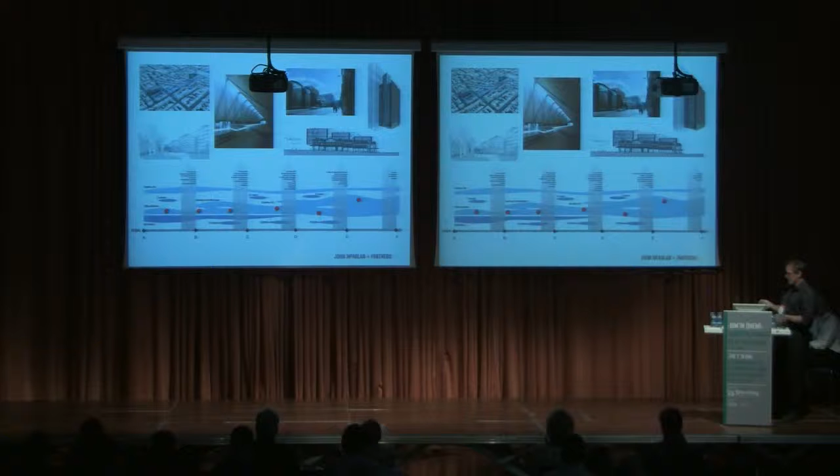We work in a very messy way, actually. We sketch, we throw things away, we reinterpret things, we draw constantly, and our method of working has to accommodate that, and we have to enable ourselves to do this kind of stuff whilst maintaining this flow of data. Okay, so I think that's a key motif of the way we organise ourselves.

As importantly, though, and interestingly, the previous speaker was talking about computational design and the continuities or otherwise with the generic idea of BIM. This process has to enable us to capture as many of those sources of information and approaches and attitudes to information to enable us to fully develop our work.

So this kind of thing, which you'll see later on, people will recognize as a BIM model. It's fully coordinated in the sense it has data attached to it, and it's a very powerful method for delivering a project. However, we have to, as architects, get to grips with and understand organising our data in structured ways, perhaps in ways that come from other domains.

For instance, parametric studies for complex curvatures, which you'll see in the project we talk about later. These two snapshots are examples of exactly this kind of thing. In this case, a neural network, an artificial neural network, to address a specifically architectural problem of form finding, and a genetic algorithm which is addressing, again, a specifically architectural problem to drive optimization in relation to a townscape and visibility analysis.

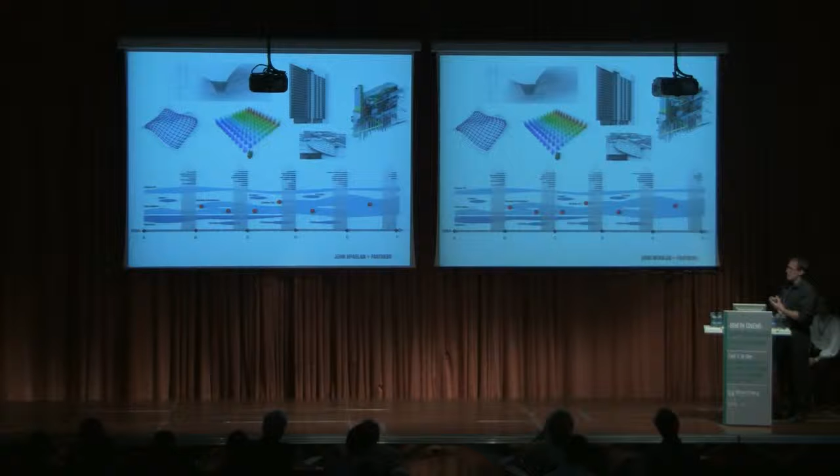One last word about the process: we mentioned that we use MicroStation, and our host Bentley, who have invited us to come here, we have a long association with them because we use their software. We use it because it supports everything I've been talking about. It supports the fact that we can work in multi-modes, it supports the openness at the beginning and end of each model, and it supports the fact that we can disaggregate data across very complex projects if necessary.

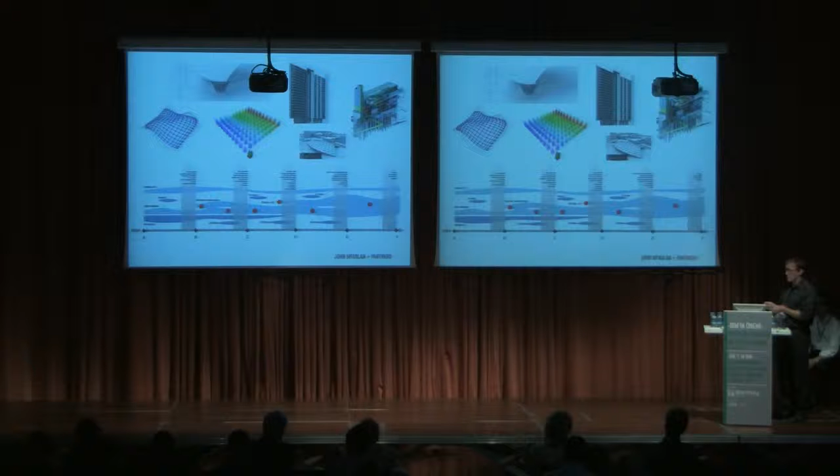And in that sense, it reflects real life. Real life can't be encapsulated in one fully coherent model, and any fully coherent model that doesn't relate to real life in some way is not of value to us. I'm going to illuminate some of those rather abstract ideas by looking at two case studies.

Both of them are actually literal examples of connections. They are both high-profile, massive infrastructure projects in London, at the heart of a world city. Their client base, the people who use these projects, is not a small, isolated group of individuals or an organisation. The numbers of clients for these projects runs into tens of millions, actually. So we can really say these are world sort of projects.

We're going to talk through these, and we're going to illuminate some of the project technology and BIM aspects of them as we talk through them. So I'm going to hand over to Hiro now to take over at this stage of the presentation.

Okay, hello, merhaba. That's all I know. Okay, I have to admit, I'm a simple architect.

He's the BIM expert. Cliff is also an architect, but he's managed to really articulate the importance of technology and BIM within our practice. I sort of pretend to understand, I don't. So maybe I can reach out to those people in the audience who are still with me at my stage, who are trying to understand what is BIM, what is a BIM in the process of design.

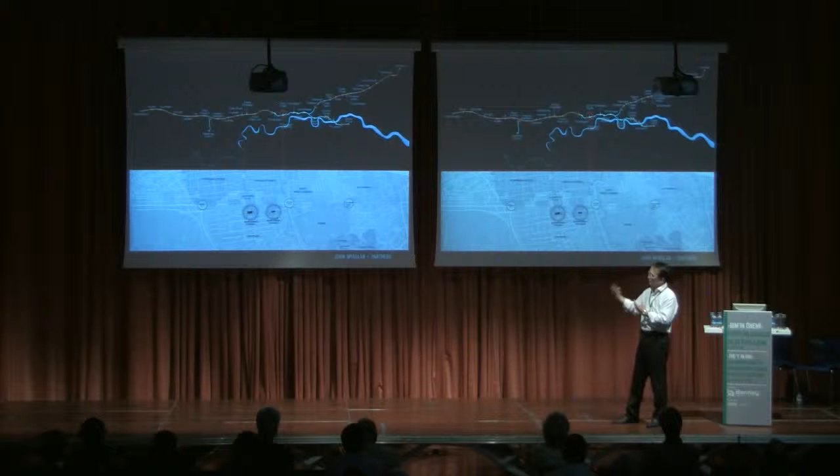So this is where my anxiety is, because I do know that the clash detection issues, which is highly important, the ability to predict what might happen during the construction stage, is all vitally critical stuff. But how does that relate to our behavior during the design development stages? I don't know. I've yet to see BIM really go in there and challenge each one of us to be able to fulfill our obligations as designers early on in the design process.

That's not to say we haven't used CAD, we haven't used technology. Of course we have. But in terms of philosophical debate about BIM and the discussions around technology, I leave that thought with you.

Just incidentally, hands up if you're an engineer. Hands up if you're an architect. Excellent, so I shouldn't be too scared then. How many of you are clients commissioning projects? None, excellent, we can be rude about them. And how many of you are contractors responsible for delivery? One sole person over there, two, three. The point is we should all be talking to each other, and this is what I'm hoping BIM will facilitate, not separate us further. Anyway, enough of that.

As architects, we develop and share ideas about our particular concerns. These are to do with movement. My responsibility is transportation and infrastructure design, so it's all about movement - movement of people, movements of vehicles, making sure that we don't clog up. This is Oxford Street, arguably one of the most recognizable retail destinations around the world.

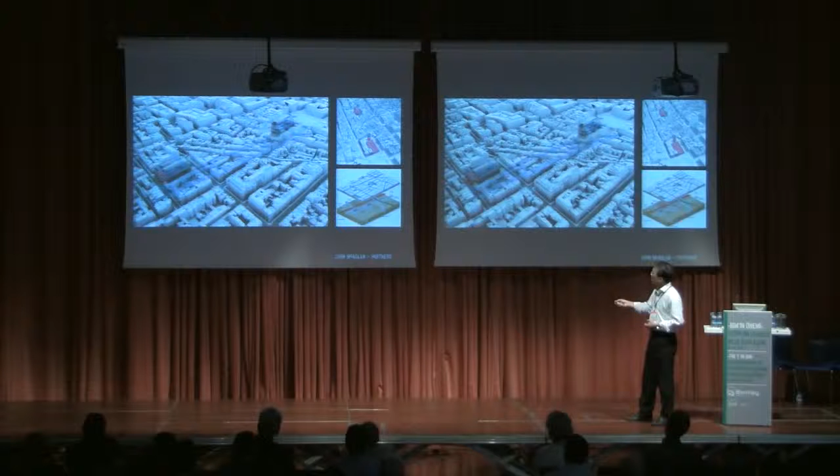So along that we have two big station structures popping up in the east near Hanover Square, and to the west next to the existing Bond Street station - major pieces of civil engineering. General arrangement, section at the top: West Station, East Station, diving down by escalators to these really long platforms.

And yes, all of that is of course fully coordinated thanks to the technology we have the ability to use. I think we initially started on TriForma - I don't know what it's technically called now, I'm an idiot, forgive me.

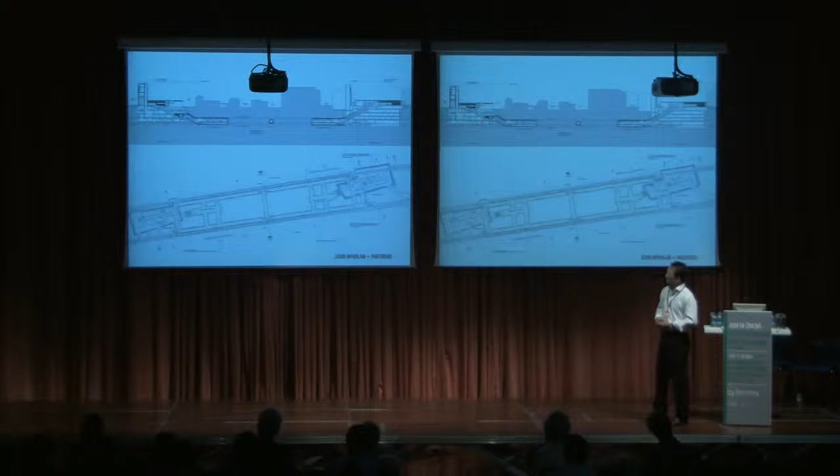I believe it's the Bentley system that we are still plugged into. As Cliff mentioned, I think it's right - architecture and engineering design can be messy, should be tactile. And that's where I'm really interested to see where BIM is going to take us, because we love models, we love sketches, we love messy things. Somehow in my mind, I see BIM as a really clean and almost sanitized version of the world, and I just wonder how that's going to provoke and challenge and take our design world into the next stage.

So at Crossrail, there were issues about external obligations in terms of how the building sat within the context. You can see there's an interesting visual - day one, just a station with a huge chimney. Day two, in the future, we have an overstation development landing on top, so all the interface issues are fairly important to get right.

Again, the BIM model allowed us to predict what happens when we're building this on day one, and all the impacts on the surrounding movement of people and traffic, but also what might happen in the future when we surcharge the pavilion - what I've called the colonnaded pavilion structure - with a 6-story building on top. It's all simulated and computational wizardry that I really wouldn't pretend to know how it all works, but it's been all assessed, and that's something we probably couldn't have done to this sophistication and accuracy maybe 10-15 years ago.

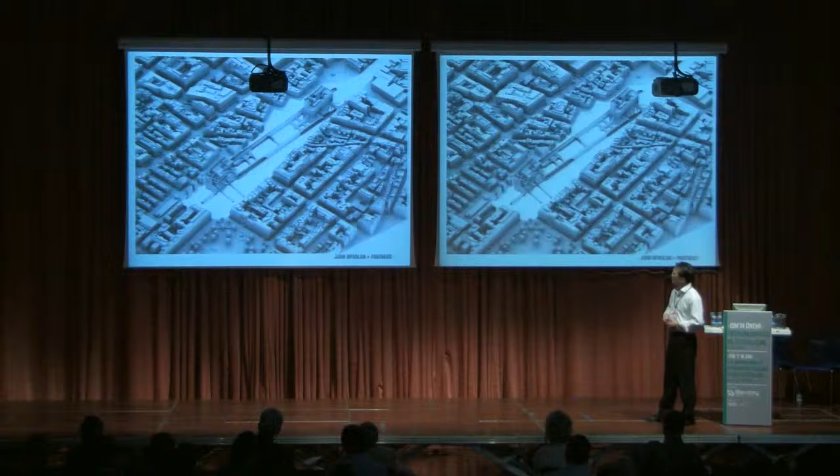And I suppose this is where I might start to hand back to you, Cliff. This is where the thinking has turned into commitments of what the general arrangement looks like in the BIM world. I hope this doesn't sound a bit too much like a schizophrenic presentation.

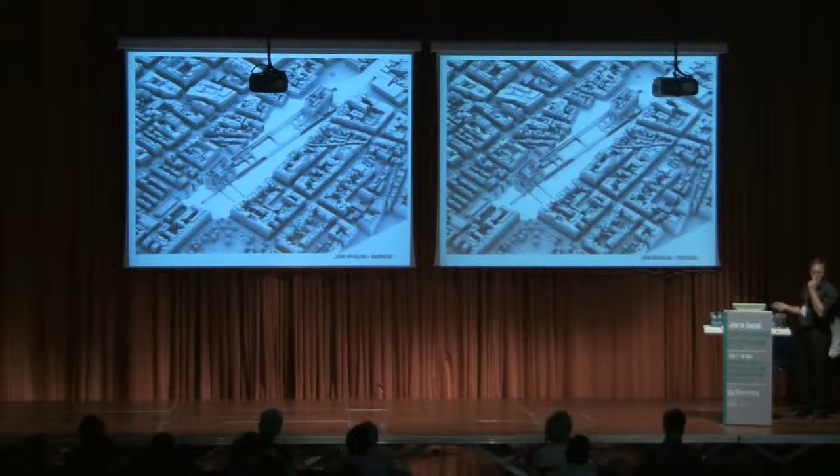Much to Hiro's disgust, underlying all the detailed work we need to do in our architectural enterprise sits what is probably the biggest BIM model in existence, and this is only a very small part of it. This is an enterprise level collaboration between Bentley and Crossrail to deliver the whole project in Bentley architecture, in BIM, using the full suite of Bentley products sitting on top of the MicroStation platform. And here's our bit of it.

There are literally thousands of models in this BIM model, so this is a big BIM model disaggregated into thousands of separate models, which makes sense. It's a really smart way to work. We can re-aggregate models as and when we need them to work on them, and that's precisely what we do.

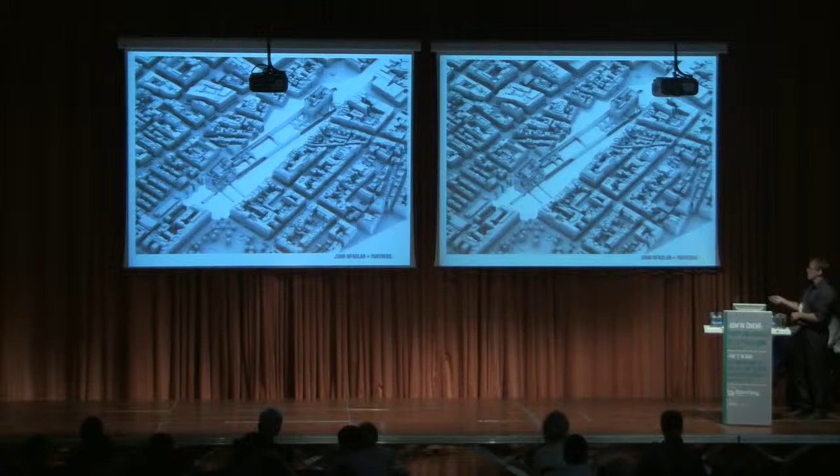So for our element, we use the models - we don't need to repurpose data. We can use it in our workflow for that kind of detail level of work that Hiro was talking about. And we can routinely use it to leverage this kind of design verification work, looking at spatial sequence of the narrative of the building and so on.

Can I just add one more thing? Just to go back to this slide, I want to mention where BIM really excels is when we're trying to do something like this. This is what I called nowhere to hide architecture. If you look up, you see things which are exposed, and there's a confidence in expressing ventilation, structure, primary, secondary, tertiary, fittings, all sorts. And that's one approach.

What we decided to do here is essentially hide all the conduits. There's nowhere to hide, so you've got to get all the conduits, cable management, everything sorted out before we go to site. I'm not saying this is - this is an amazing space and it's got this amazing quality to it, but we're trying to do something where we really would have had trouble doing it if it wasn't for the CAD and the IT technology, equipment and tools that we have.

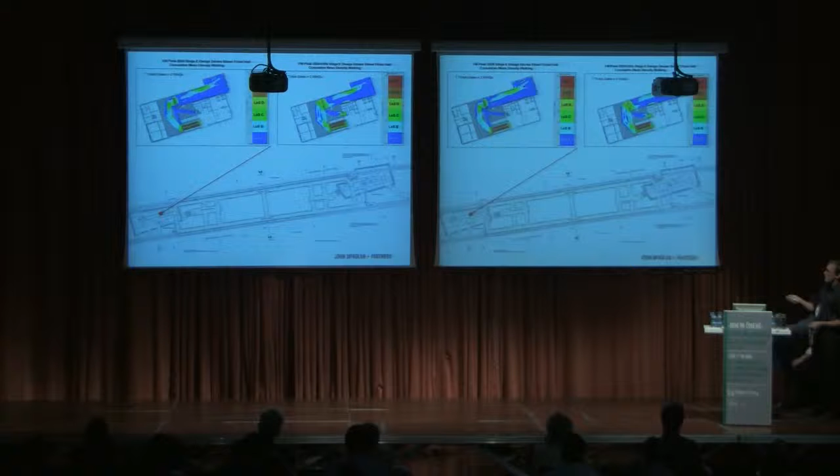So having the model and having the data, without repurposing that data - it's persistent data - we can use it to run all kinds of simulations. These are pedestrian simulations done using Legion software, but using the same source data set from our model. So a constant series of design validation checks, if you like.

We can represent the model to give confidence to all parties involved in the process with regard to all kinds of issues, in this case buildability or sequencing. The ability for us to give very strong expression to this is absolutely critical to our work. So that's why you're seeing a lot of these visualizations. They're actually really important in our work, and we use them all the time.

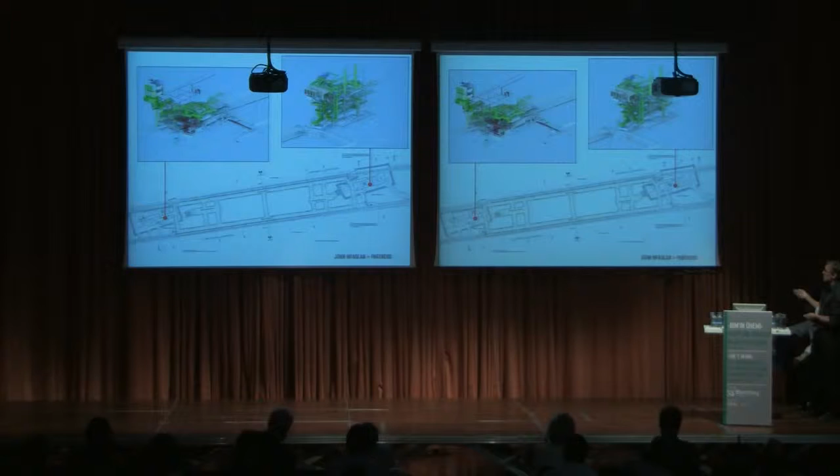Just another sequence of images showing the level of granularity that this model can go down to, really, for not just coordination, but for ensuring the provision of a design that works. And that level of detail is an aspect of BIM that we take for granted. That looks like a BIM model.

Sitting on top of this and working alongside it is our multimodal work that is equally as important to the project. And with that, we'll move on to the next case study. So Hiro's back again. All right.

So as a contrast, King's Cross, and again, delighted to have been selected for a prize in last year's Be Inspired event. I remember we had a really fascinating discussion about the use of BIM for a heritage building or an existing building. I think the general feel that we all have is that if it's a completely new build building, it's kind of easier to do a full-scale CAD model than something meaningful. But we get sort of confused - we have uncertainties about doing something for an existing historic building.

Why would you want to make a full model of an existing building? Well, I hope through this sequence of slides I can share with you how we managed to work off the immense capability and resource that BIM represents.

So this is a historic building, quite a contrast to Bond Street, a spanking new building that'll be finished in seven years' time. This dates back to 1852. Just remember the clock tower here as an orientational device when we fly around the building in a moment. It has all sorts of built-in beauty about it.

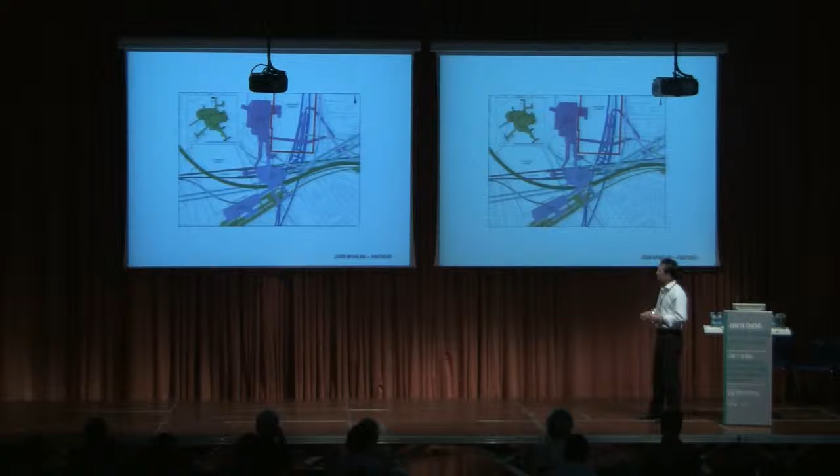At the heart of it, going back to the movement issue, we have to integrate this station into a modern transport hub. We have five underground lines coming into this station, as well as St Pancras station adjacent, which if you've been to London you'll know is where the Eurostar, the international line, comes into London. So this also has an international dimension.

Some statistics - so it's a big project, and it's a huge investment. It was, I think on the brochure, something like 547 million pounds. What's that, probably about $800 million. That's a stupid amount of money in many regards, so we've got to make sure we make the investment work really hard.

That's both internal, making sure the space is wonderful and encourages more patronage, more usage, but also external. So we are essentially recharging this part of forgotten London into somewhere that businesses want to come, you want to come to, you want to bring your family to as well.

So this is a helpful orientational drawing - clock tower back here. We're flying to the north of the train shed, cutting a section. The project doesn't look like this, we've cut a section through it - I'm explaining that for contractors who can't read our drawings sometimes. So we have the double-barrel historic train shed, that was a joke, and we have the new concourse structure to the west.

This building is grade 1 listed, built by a very important Victorian engineer architect, Lewis Cubitt, who also designed the Great Northern Hotel. This is a very typical typology of main terminal stations in London - you have a big railway station and an associated hotel structure. So the project is essentially in two halves: working with this amazing, beautifully clear Victorian piece of engineering and construction, and a new building, which people consider to be the sort of sexy bit.

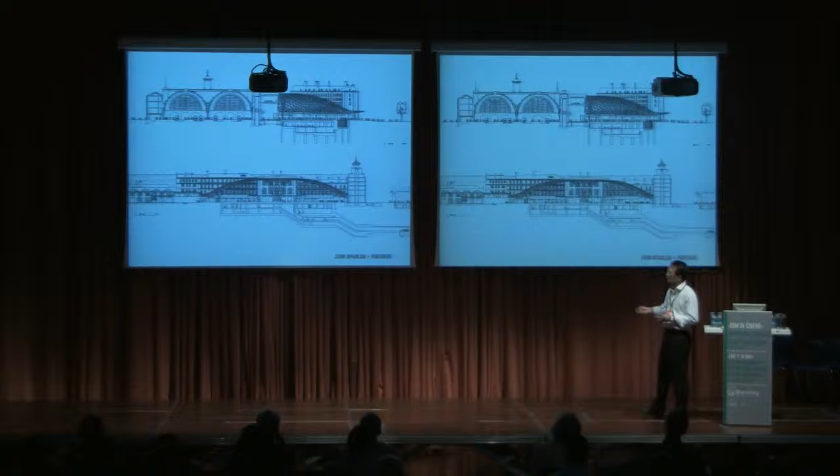And that's where we really enjoy the challenge of expressing engineering architecture, where you can't really tell where it starts and where it ends. And actually, if I'm completely honest, it was a completely collaborative process. We were talking to each other - engineers and architects talking to each other.

So going back to the historic bit, this is about peeling away, cleansing and tidying the historic building. And again, I guess in some regards, limited use in terms of BIM.

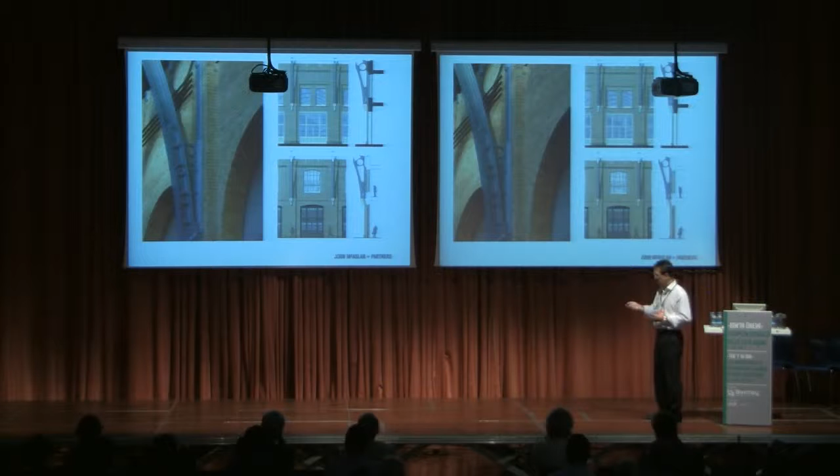However, there were instances where we essentially had to find ways to put in CCTV, PAVA. And we did that by doing a model of the existing historic building, finding ways discreetly and minimizing the need for repair and additional works to conceal, where possible, unwanted conduits. So cable management was a very key part of the design process, which we did with BIM technology.

Here it's another fairly simple CAD model that we built of the historic train shed at a key moment where we are introducing a new bridge with escalator links down, passenger lift, and a lift for onboard services, OBS - this is where the trains get charged with teas, biscuits, and sandwiches, and so forth. So again, we were using computer technology, CAD, and 3D modeling across the entire field, not just in the sexy new bit.

It came into the simulation of the remodeled Victorian building, and became really useful in situations like this gate line, where we delineate the paid side, where people have tickets, from the unpaid side where people don't. A very important threshold.

This was created within essentially a 30-meter zone within the Victorian brick building. If you know anything about Victorian buildings, they're load-bearing brick buildings made of walls. So to create this big open span space by introducing this tremendous new structure, we had to get it right, underneath three stories of Grade 1 listed National Monument heritage structure.

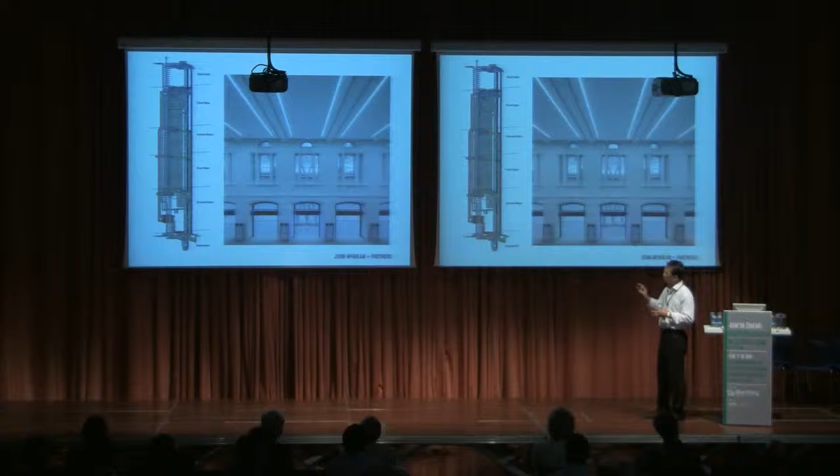This is an important space used to handle postage, letters and parcels, called the parcels atrium. We decided to open this up into a restaurant without filling it full of conduits and additional structure. We found the floors were unstable and failing, so we had to introduce additional stiffness, and we could visually and physically control that by creating the model you see here.

But going back to movement, it's all about movement.

What this does is two things. One, it creates an underlay for a guy like me, I read Legion model plans, and I can say this is how a station or shopping center should look, and this is what I enjoy. So we can get the flow of people through space absolutely spot on.

But also, we're realizing that understanding movement is key to realizing an important agenda that clients like Network Rail or Istanbul Metro Authority will have, trying to create revenue from their investments through retail facilities. If you don't get that right, you could miss a huge opportunity to create a win-win: a win for passengers to find good, convenient, high-value retail, and a win for the operator to gain revenue from that investment.

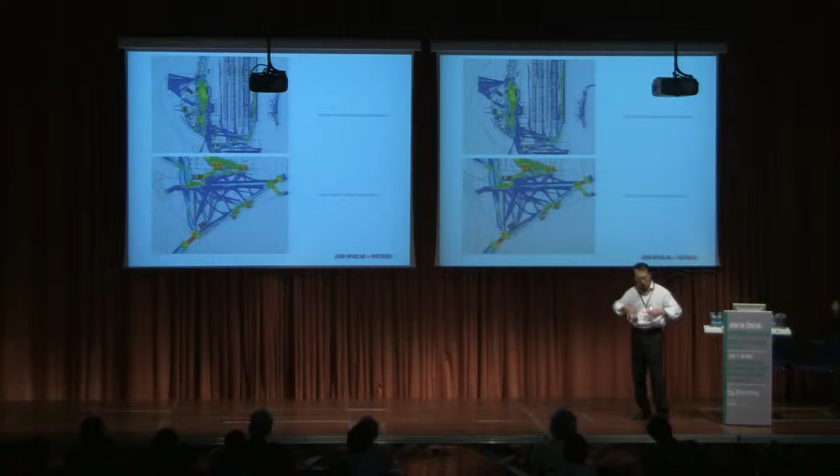This extended not just into the concourse area but also associated underground passageways. King's Cross Station handles about 50 million passengers per annum, about a peak of 150,000 passengers a day, and 60% of that is interchanging with different modes, particularly London Underground. This diagram shows the movement generated by the mainline station at King's Cross into the metro station below.

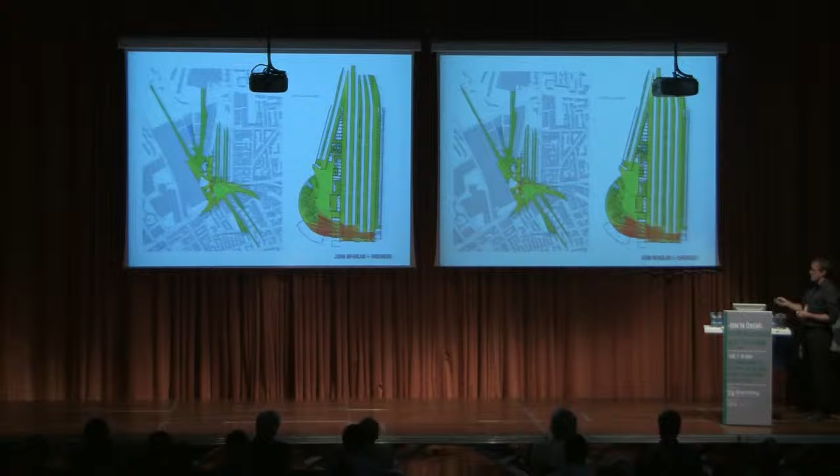We continued this with macro analysis. One interesting thing, coming back to the idea of connecting this persistent data flow through the project, is that we can carry out modeling and validation during the design phase, but we often leave buildings alone once we finish our active involvement. We've been fortunate to continue our involvement in a different register with this project, attempting to create that connection of data further into the project cycle.

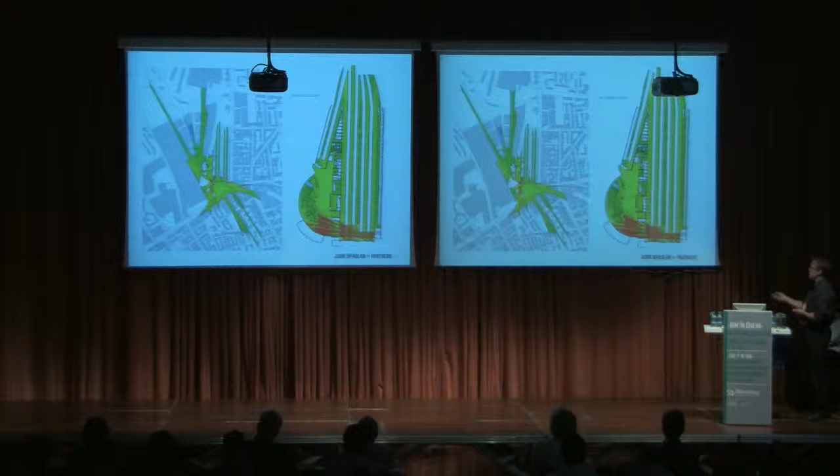This is a collaboration with University College London, looking at space syntax analysis of the project, understanding architectural configuration and how it relates to natural human movement through spaces, combined with actually observing how people use the station. The station is now open and being used, and it's a very gratifying experience to go into the building and see it being used in ways that you imagined it would be.

We can measure that, we can plot it, we can use GIS technologies here, another technique from a different domain of architecture, using statistical spatial analysis to understand what's happening in the project. These studies are carried out by architects. These correlation diagrams are produced by architects to understand the correlation between the theoretical model and reality.

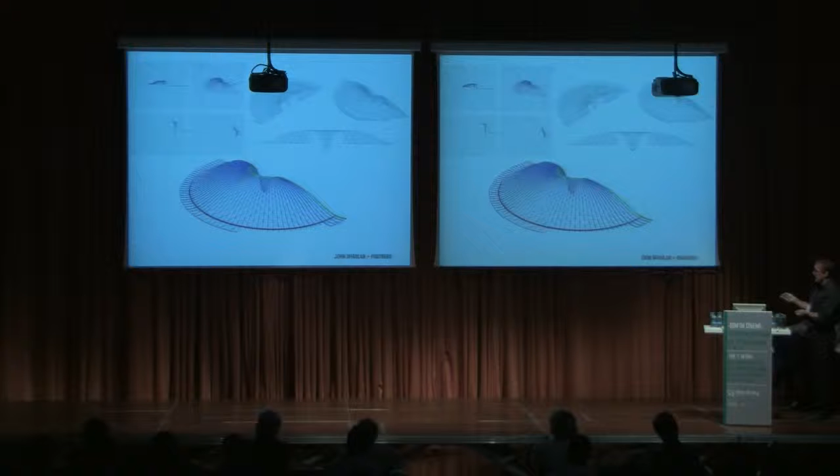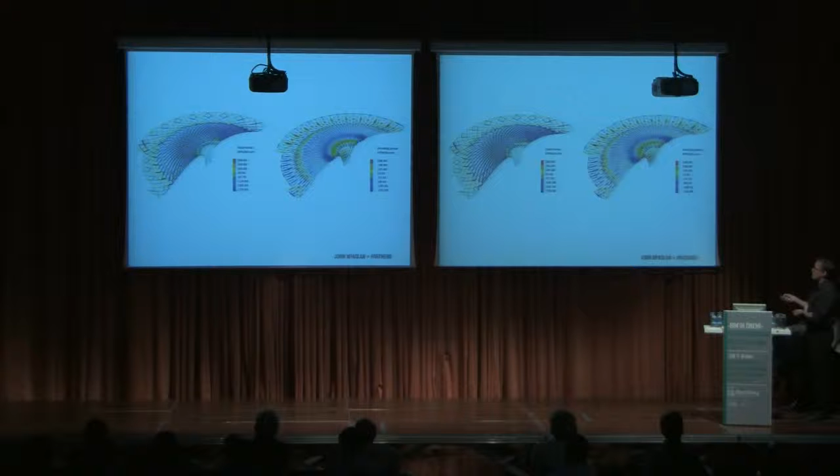The sexy bit of the building that Hiro mentioned, which gets everyone's immediate attention, is an almost seamless junction of architecture and engineering. So where does one start and the other finish? Actually, they don't—they just meld together completely. From the earliest phases of the project, architects and engineers at Arup, the structural engineers on the project, were working collaboratively and seamlessly together, producing a geometry statement to define the basic organizing principles of the roof, working in a range of software—Bentley MicroStation, and structural analysis software developed bespoke by Arup—to analyze structurally the performance of the evolving design. That design couldn't have been achieved without that very close collaboration at that stage between architect and engineer.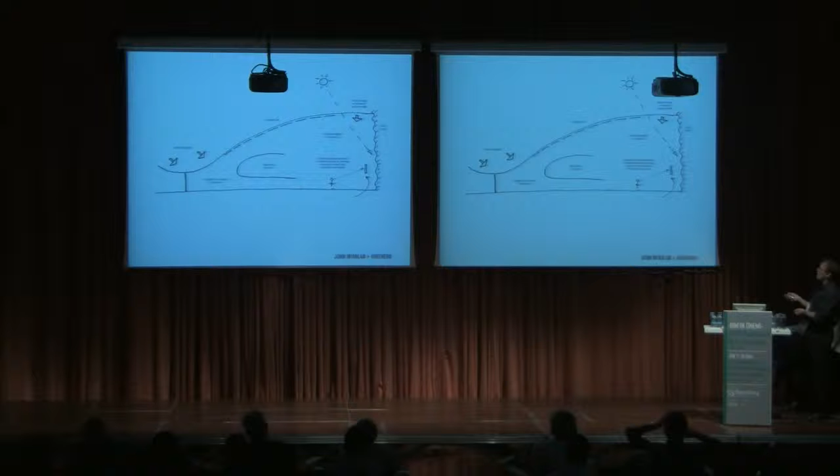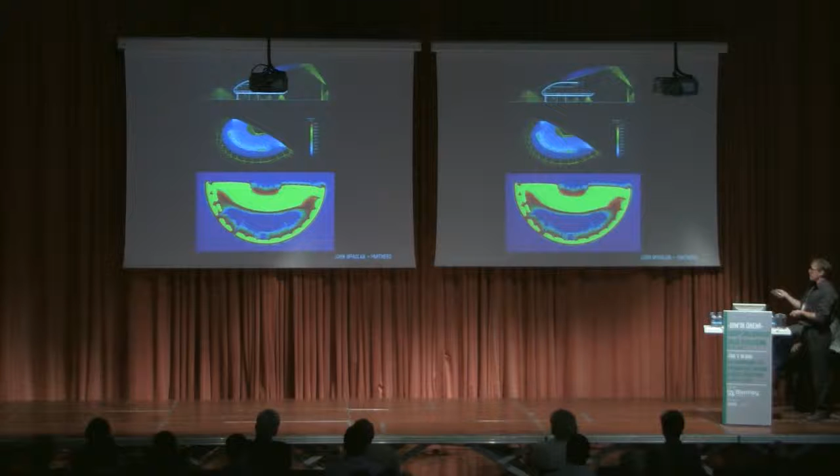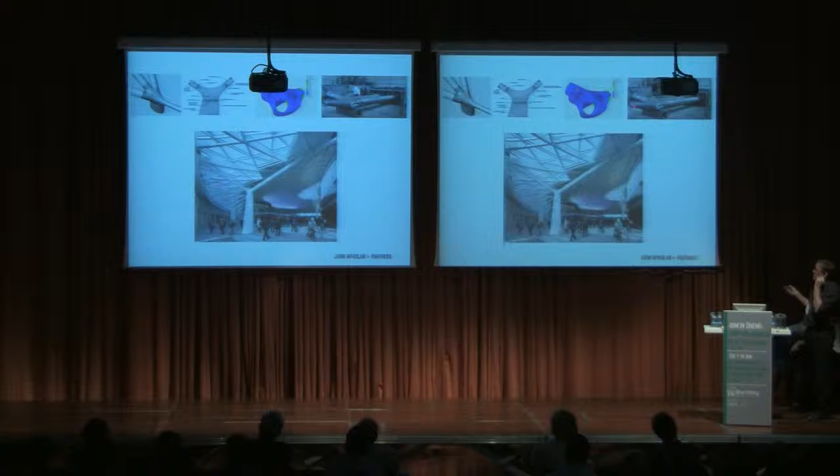Similarly, in a different discipline, the lighting of the roof, a key component of the design, was intensively modeled using the same data—this is not repurposed or redrawn. These are the same wireframe models used to analyze lighting conditions for the artificial lighting design. The actual geometry from the coordinated design was then passed through the project, from early concept modeling through to diagrammatic drawings, through to analyses of the structure, finite element analysis, and then that same data was passed on to the contractor and fabricators, who, particularly in the casting of these nodes, actually used the 3D data directly.

And here it is—here's the result. It's, I would say, emphatically a delight, but not in an overtly technological sense, if that makes sense. We appreciate this for the beauty of the space it creates, in ways that we can attempt to build into our process and express in our BIM model. If we try hard enough, we think we can achieve some pretty good results. This kind of project, I think, represents where we are with that attempt to build a connection between BIM and beauty. So, thank you.

Would you like to send any questions to our guests?

Well, there's just one behind.

Sarp Sabuncu. I couldn't able to understand directly how the revenue—after, how you are getting the revenues. You have been talking during the operation period of a metro station or something, how you can increase the revenue, and how you can solve this one with BIM. I couldn't able to understand that part. On one slide you have been discussing about during the operation we can analyze that, and I couldn't able to understand also, that's why I'm lost a little bit.

Okay, can you hear me? Okay. So I think, forgive me, I think you might be referring to what we said about the use of computational modeling, CAD modeling, on the performance of space during design and then after design. Is that the bit that you want me to explain a little bit more about?

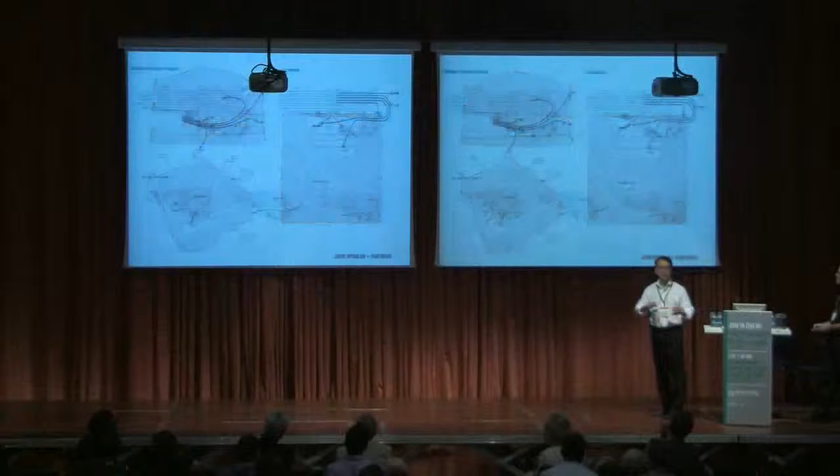That diagram was about understanding the movement of people through the station. It's a multi-service station, a multi-passenger profile station. By that I mean it serves commuters, people going to work, long-distance travelers who may be going to work or traveling on holiday, and first-time travelers who probably need to be given space to understand which way they need to go. It's a mixture of passengers using a mixture of lines—intercity, short-haul, regional, international—lots of different passengers. So what we mapped out was essentially the potential movement of those passengers. This is about the arrivals from what we call suburban trains—commuter services servicing an intermediate region like Cambridge, an area you may or may not be aware of.

They generate the biggest passenger pressure within the station because a lot of commuters live in that region, St Albans, Cambridge, in that direction. So we had to make sure we understood the flows, which essentially generate the widths and volume of space we need to allow for, and which way people go. How many go into the underground, how many into other lines, how many to the street to pick up taxis, how many to buses, how many just walk to their destination? That's what this illustration summarizes, a simplified version.

And here it's about people arriving on the long haul train, from long distance, Scotland, further up north of England. Again, where do they go, and what percentage go into the metro, buses, taxi, etc.? We run this for all the permutations. It might be a student arriving to go to a nearby college, so we can map what that route might be and the intensity of usage. So these are the things that inform the basis of a layout, all about people movement, where people need to stand, move, check directions, check tickets. This formed the foundation for the blueprint of the station.

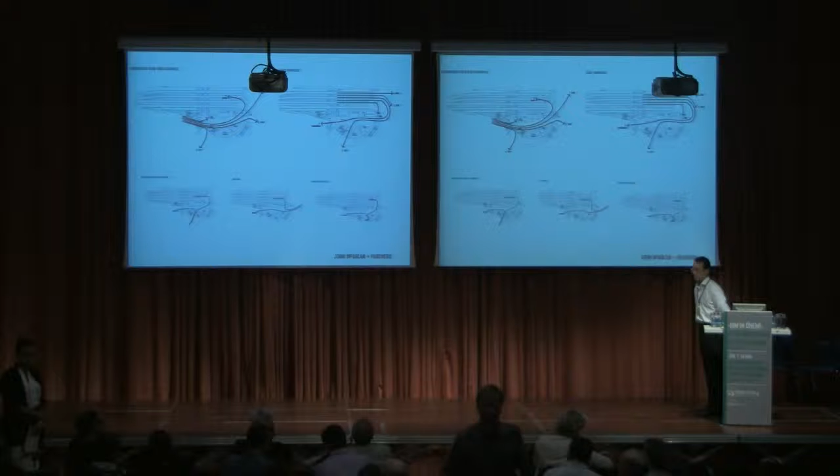Thank you for the presentation. My name is Fatma, I am an architect. Which kind of communication or non-communication problem did you encounter, at which level, with the client or between the team? Although you are using BIM and emails, how did you prevent or solve those non-communication problems regarding the project?

Okay, thanks. If I may answer this way: the project started in 1997, really got going in 1998. If you remember what the world of IT and CAD was like in 1998, you can guess it wasn't as energetic as it is now. So we essentially introduced BIM, as we understand it now, into the project during the course of the 16 years we've been working on this. Nine years of that has been in design, and four, five, six years on site.

We're just opening, actually today, the final piece, which is the square in the front. So there's a big ceremony today with the Mayor of London opening that, but I prefer to be here in Istanbul. Come on, it's 28 degrees outside, no brainer, an obvious choice, to essentially mark the completion of the project. So it's been a long period of time.

So I guess it isn't a clean BIM exemplar where we had the ability to use BIM across the entire project and bring it together. It actually appeared here, then appeared there, and we eventually slowly pulled it together during the final stages of implementation, construction, and delivery. So how did BIM help the conversations?

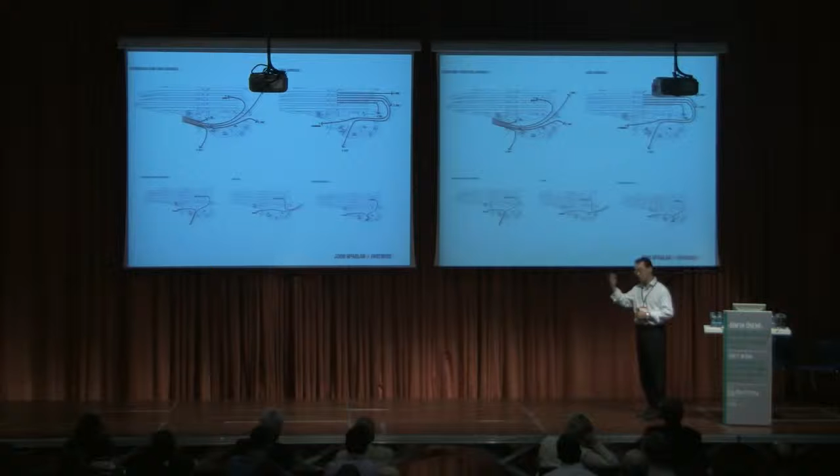Certainly we enjoyed and benefited from BIM, but unlike Crossrail, where we started really from the word go, King's Cross kind of happened in a slightly undesigned way to get to the product that we've shown you. Thank you. Okay, great, thank you.